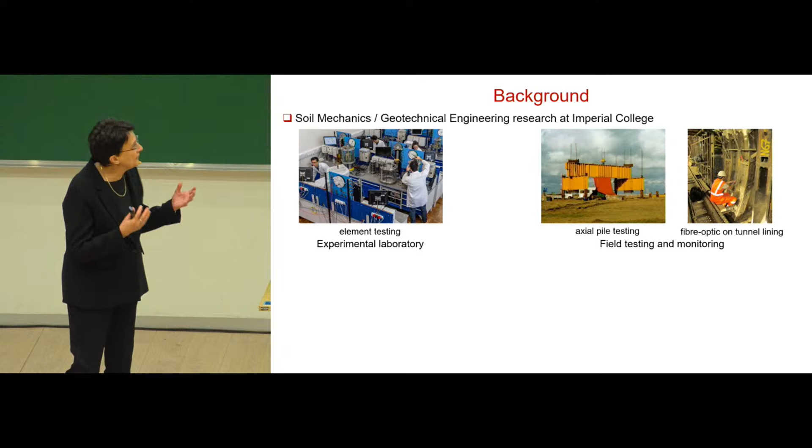The other part of our research, also from those early days, is field testing and monitoring. So going into the field, here having a rig with an instrumented pile being pushed into different soils to enhance the design methods for driven piles. And then instrumentation, developing some of the sensors, but also going into the live national infrastructure.

My colleague Jamie Standing was here last year to give a lecture about this, placing fiber optic sensors or many other sensors in tunnels or on the ground surface to monitor deformations.

And then the third part of our research is computational analysis, computational geomechanics, that started to develop with Professor David Potts in the early 80s when he became a member of staff at Imperial. We developed our own code from scratch, so it is very simply called ICFEP, the Imperial College Finite Element Program.

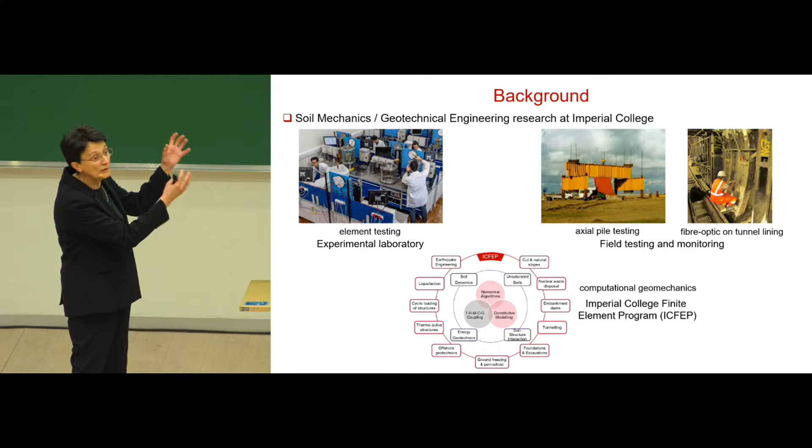It is fully coupled with thermo, hydro-mechanical, chemical and other processes in the soil. We developed the actual nitty-gritties of numerical algorithms, but also constitutive models, boundary conditions, and then applied them in the range as we developed over the years. This is not all developed at once; we still develop the code as the problems in geotechnical engineering keep coming out, requiring new answers to be devised and explained.

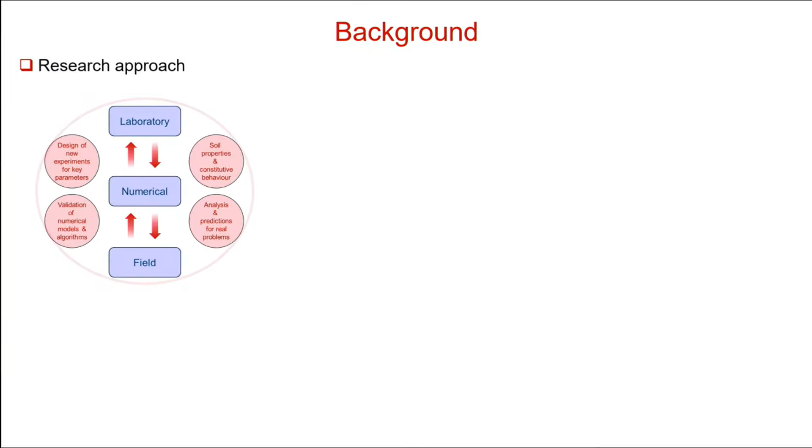So the research approach that we've always had, in particular in numerical modeling, has been this continuous interaction between the laboratory and the field, getting the input to numerical modeling from the laboratory, analyzing, predicting the behavior of geotechnical structures, and then, when possible, having the precious monitoring data to validate our predictions, and then go back and instruct the laboratory what other tests need to be done to define the parameters of the soil behavior that we need in particular applications.

In addition to this, we have always worked very closely with industry. From the early days, David Potts has always been engaged with offshore developers, in early days oil and gas, then infrastructure with earth dams, embankments, slopes, working with London Underground because of the metro network, with Network Rail, with Environment Agency for flood defenses and things like that. And then, obviously, tunneling, deep excavations, that is the bread and butter type of work.

More recently, as the demand for energy transition grew with climate change and reduction of carbon emissions, working on foundation systems for offshore wind farms, as well as with thermo-mechanical coupling with thermoactive geostructures to use the potential of geothermal energy to translate that into effective heating and cooling of buildings, and nuclear energy, and so on. So this is the framework within which we have operated for over 40 years. As I said, we are still developing the code and still carrying on with our numerical work.

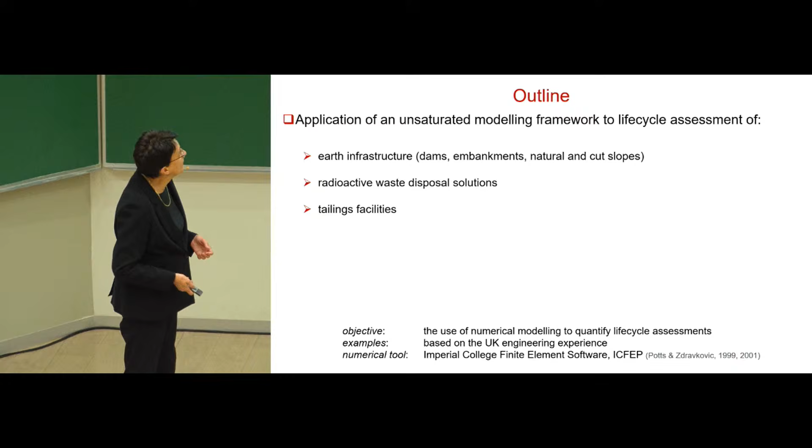The radioactive waste disposal solutions may not be an obvious thing, but this is very important for the UK because the solution is using highly swelling clays as engineered barrier for this disposal. And then tailings facilities is something that we have started to work with more recently, again, engaging through students' projects, master projects, final year projects with different companies to address certain problems, what the mechanisms may look like in certain situations.

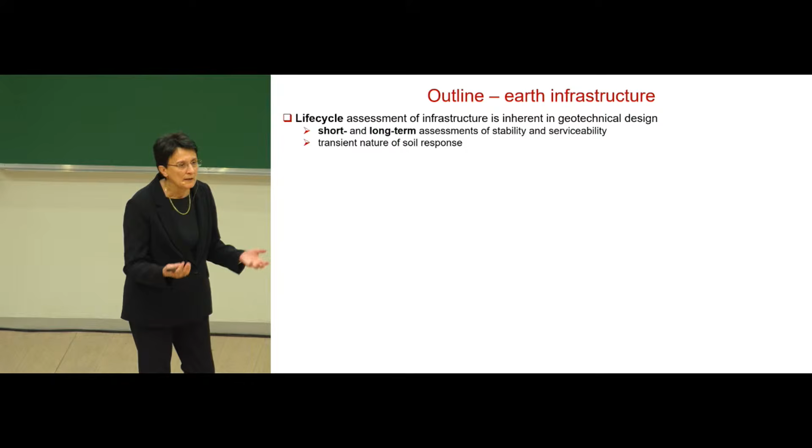So starting with earth infrastructure, the objective for using numerical analysis often is, and in the UK that is currently a very frequent demand, life cycle assessment of infrastructure from being constructed to at least 120 years in the future, which is a design life for most of the structures that are currently being built, on our most recent project, high-speed rail. So all the cuttings, cut slopes, tunnels, they are required to be designed for 120 years design life.

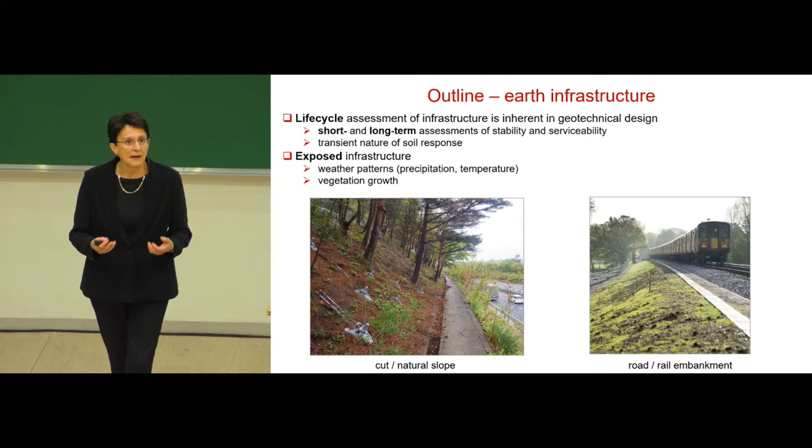So when we look at this sort of short and long-term assessment, this life cycle has always been in geotechnical engineering, because that is what we do. We often have short-term stability, long-term stability, serviceability. And in this case, I will concentrate on what I call here exposed infrastructure, because we have not just the soil-structure interaction, we have the interaction with the atmosphere, so precipitation, temperature, as well as interaction with the vegetation.

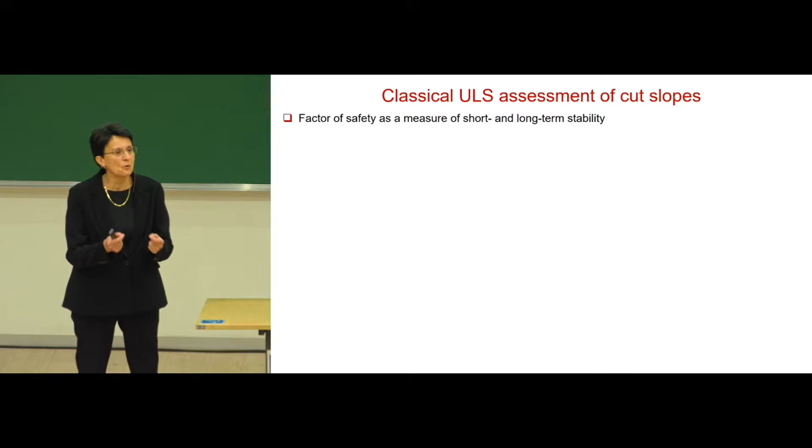So most of the slopes in the cuttings or in embankments are vegetated, and that causes issues in maintenance. So the question here is, what is it that we need to quantify in this life cycle assessment, and how? And through these three settings, I will go through the development of the approach over the years as the demands for assessment grew in engineering practice. So starting with delayed failure of infrastructure slopes, traditionally in classical ULS assessments of cut slopes, factor of safety has always been a parameter to quantify the short and long-term stability.

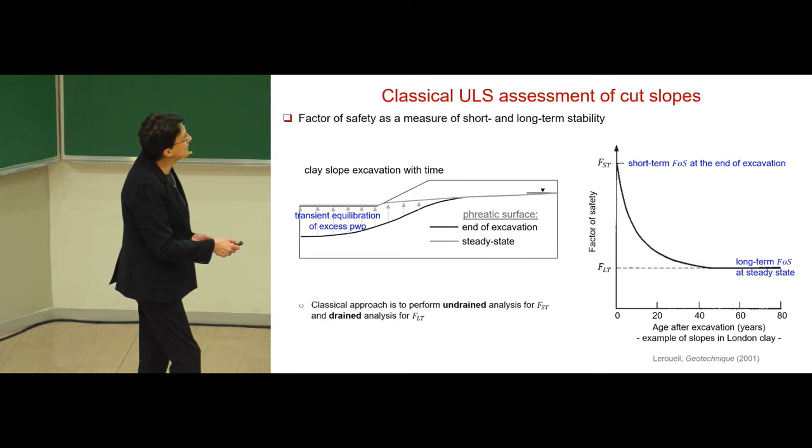And what we traditionally do is perform an undrained analysis to calculate a short-term factor of safety, and then a drained analysis to calculate the long-term factor of safety. But in reality, the soil behavior really is transitional between the two.

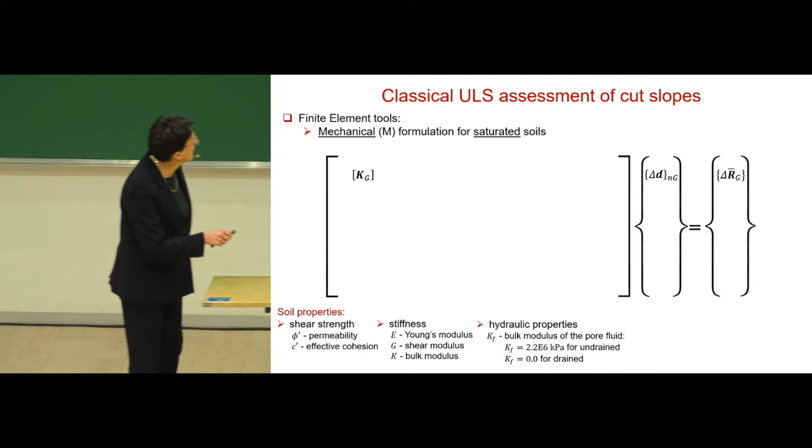And in terms of computational analysis, finite element analysis, this is a typical governing equation for saturated soils. So this is where we started back in the 80s and 90s. We have just displacement degrees of freedom. In terms of soil properties, we are worrying about shear strength and stiffness. And then for hydraulic properties, we need to use a bulk modulus of the pore fluid, which is a high value for undrained analysis or 0 for drained analysis. So, from today's perspective, a reasonably simple finite element setting.

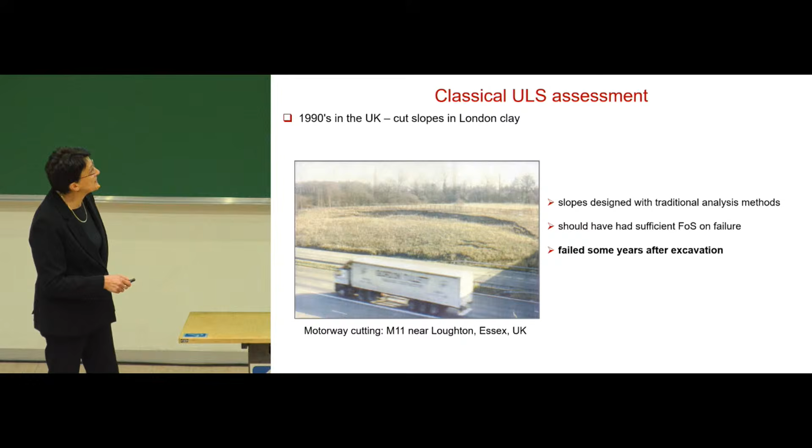The problem started to appear in the 90s when some of the slopes, these cut slopes that were constructed decades before, suddenly started to fail. Although their original design had a sufficient factor of safety, these slopes started to fail some years after excavation. The reason for this was attributed to progressive failure, but without numerical analysis it was difficult to actually quantify and demonstrate that mechanism.

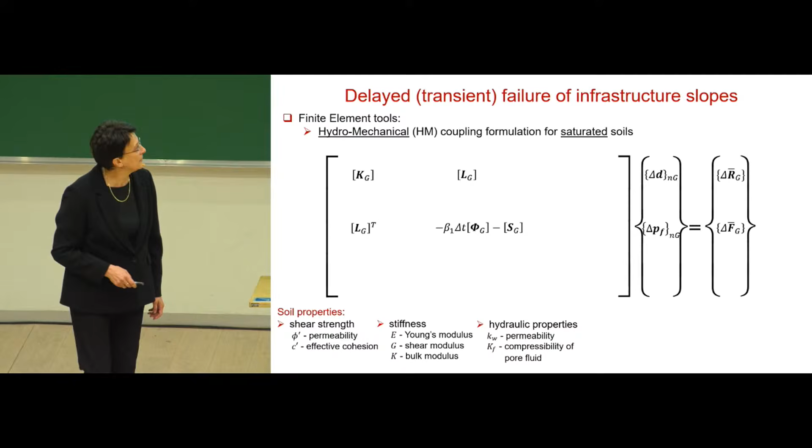And so for this reason, we have to move to transient analysis, to coupled analysis, because this is neither a drained nor undrained state. It is a state somewhere in between those two limits. So a hydromechanically coupled formulation for saturated soils requires a pore pressure degree of freedom, some coupling matrices, and the permeability of the soil, as well as compressibility of the pore fluid, in addition to what we do with the mechanical aspect of the soil.

And therefore, we now need to look at the soil behavior more closely, because this type of failure will appear in soils like London clay, so stiff, over-consolidated, plastic clay, that in our traditional q-p diagram will have a peak and then a reduction of strength to some residual value post-peak over a certain deformation.

So in these early days, we used a reasonably simple constitutive model, a Mohr-Coulomb model, but allowing that model to have strain softening from peak to residual, both in terms of phi' and in terms of cohesion. The rate of softening for London clay is from 5%, where the peak strength appears, to 20% at residual value. We also have to worry about the permeability of London clay, in particular the field permeability, because intact permeability obviously is not that representative in the field.

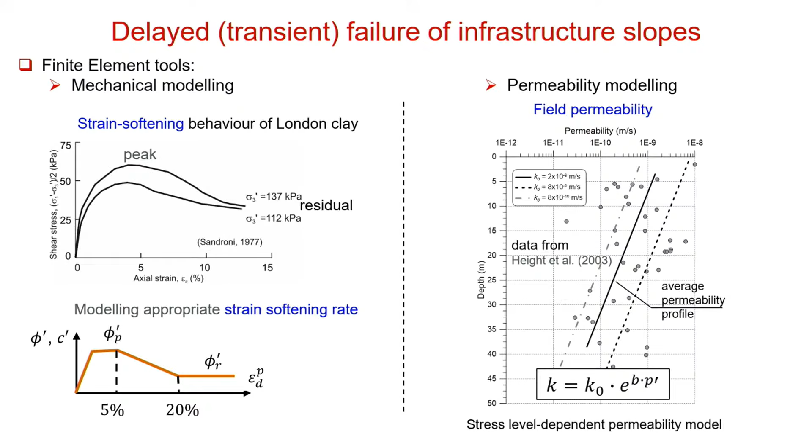London clay, being over-consolidated, is also a fissured material. And so the scatter that we see in permeability versus depth is reasonably large; people working in the field would recognize how notorious it is to actually measure the permeability of any material. But what is obvious here is that permeability seemingly reduces with depth, but actually it is not depth. It is permeability that reduces with stress level, and in our treatment of London clay we use an exponential function, where K0 is permeability near the surface, and it reduces as the mean effective stress increases with depth.

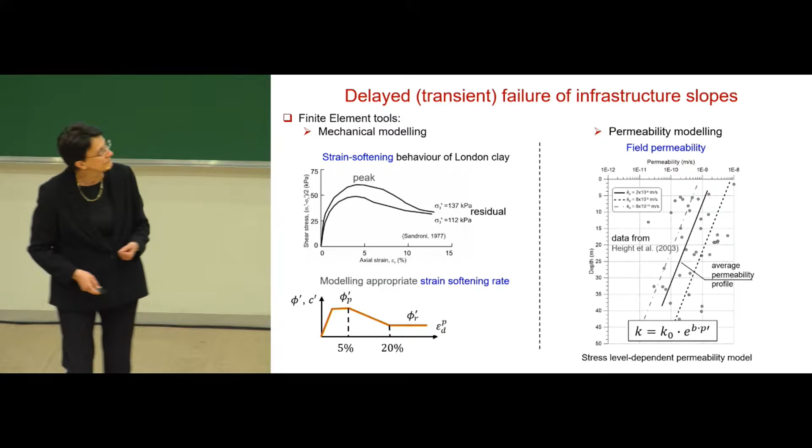So the other thing that now becomes important to introduce in the analysis, when we simulate this excavation and we end up having this new boundary, starting from the reasonably horizontal ground surface, we have a slope and then the base of excavation, is the hydraulic boundary condition.

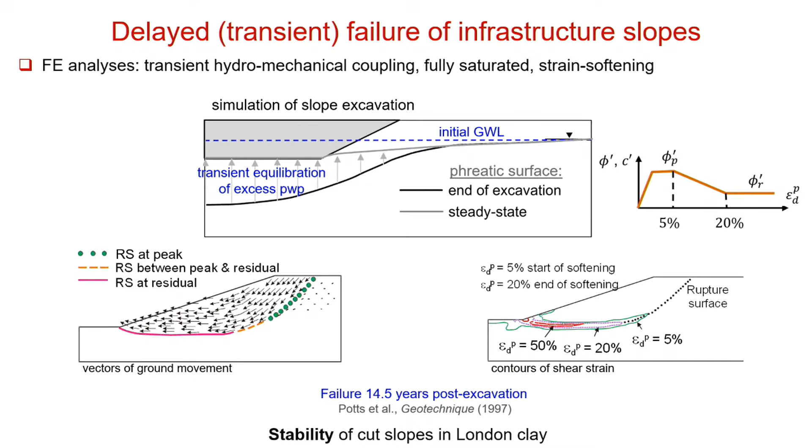So the shear zone clearly develops, and in this particular case, for this geometry, failure happens 14.5 years post-excavation, and vectors of ground movement show that failure very clearly.

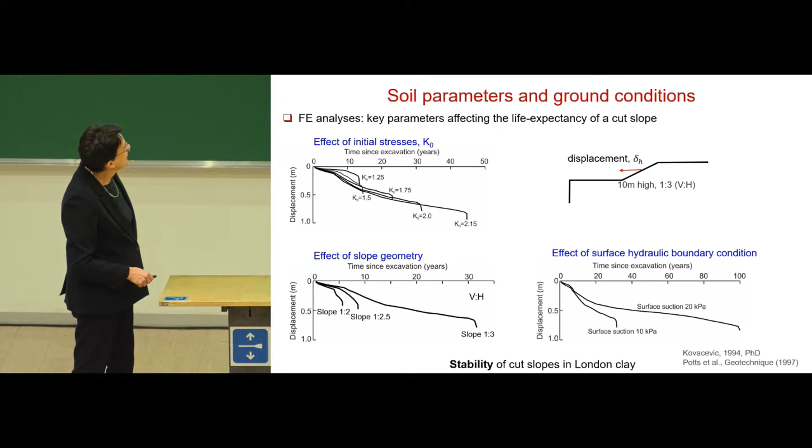But you can see these vertical sort of cusps indicate that these are very sudden failures when they happen. How the slope inclination affects it, and also how this pore pressure boundary condition affects that stability. And most importantly, how the softening rate affects that stability.

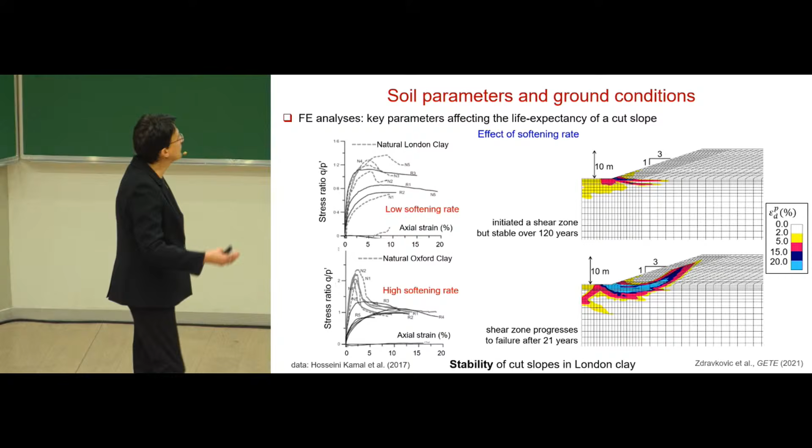So for London clay softening rate, which is something that we call here low softening rate, for a slope of these dimensions, the shear surface may start to develop, but then it remains stable for all 120 years of the expected design life. But for our stiffer, older clays, like Kimmeridge clay, like Oxford clay, that have much more rapid softening rate, the same slope would fail after 21 years.

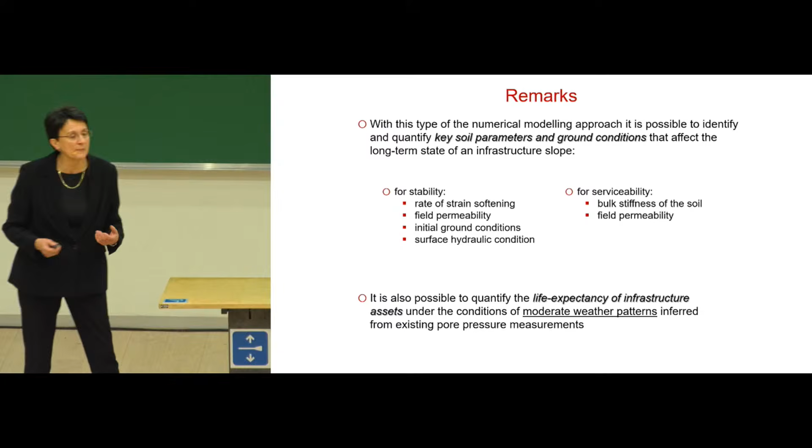So with this modeling framework, we started to be able to quantify both the soil parameters as well as ground conditions that would affect the stability and serviceability, and also quantify the life expectancy of such infrastructure, not only slopes but embankments as well.

But this was all done at the time when we had a moderate climate. Peter Vaughan was measuring very repetitive seasonal changes in the pore pressure, and we could use a pore pressure boundary condition.

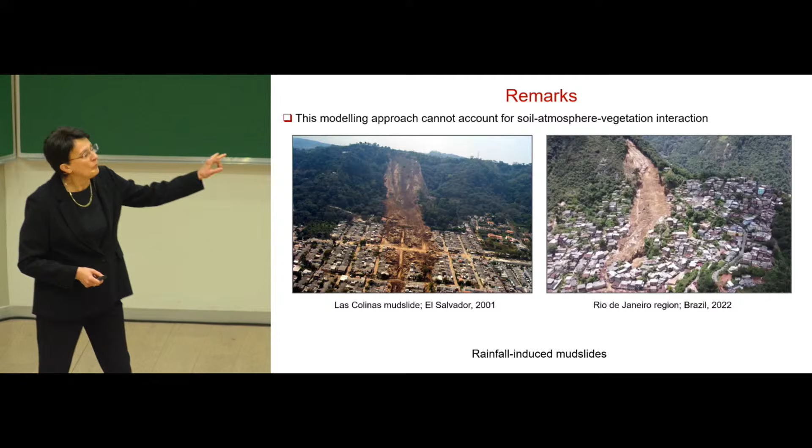But when we go further afield, to areas where rainfall is the main driving force inducing landslides or mudslides, and more recently in the UK as well, after heavy rainfall we very frequently see a slip like this in an embankment, or a slope getting deformed, because the climate has started to change. We have more and more heavy rainfall from the ex-tropical storms from the West Atlantic, and from the records from 2000 onwards, the intensity is much, much higher.

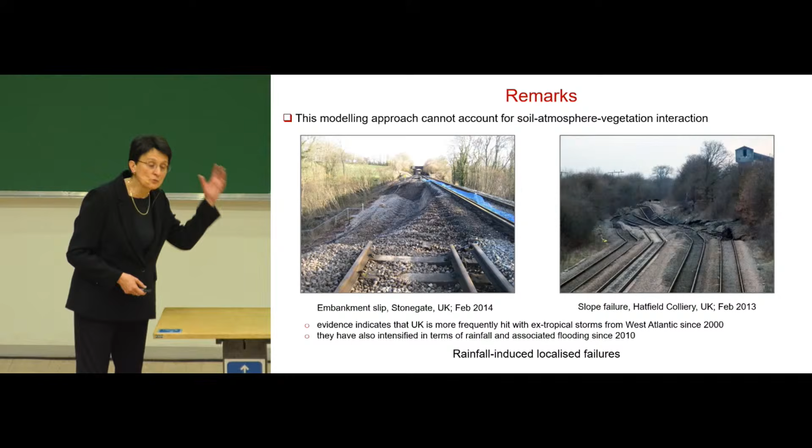So with the framework that we have, which is a saturated framework, we can't really tackle problems like this. And that is where the evolution of the modeling framework comes, having to take care of the interaction between the soil and the atmosphere in terms of rainfall, but at the same time take care of what the vegetation is doing in the slopes and embankments, so the whole soil, atmosphere, vegetation interaction, because the roots of the vegetation will be taking the water out at depth, and that depends on the suction in the soil.

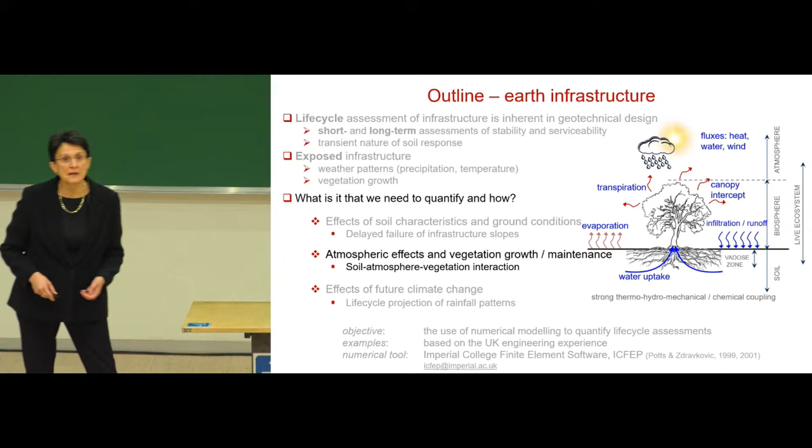Evaporation is happening from the ground surface, and rainfall comes in, and it either goes into the ground or runs off. So we have to move from this boundary condition to actually taking account of rainfall itself directly. And so we need to develop boundary conditions now, like precipitation, which is a dual boundary condition that will either allow infiltration into the soil if the permeability of the soil allows it, or if it doesn't, it will essentially run off.

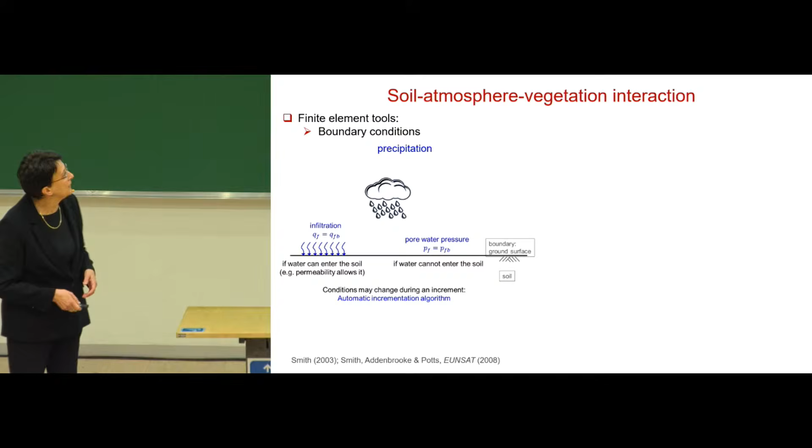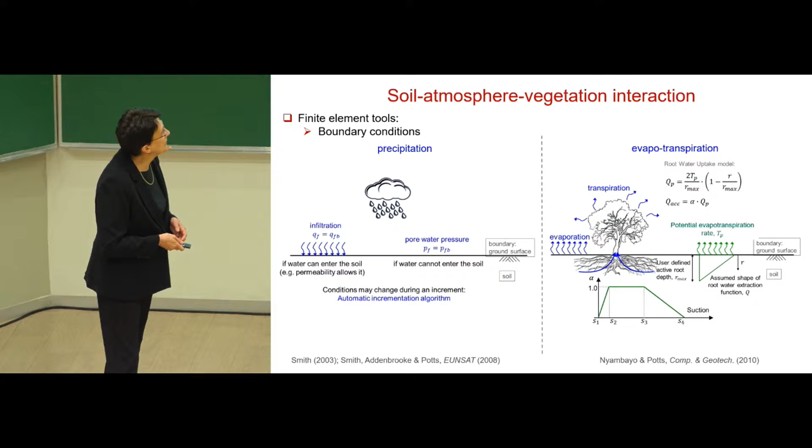We also need to change our constitutive mechanical model for the soil, and here we have adopted the Barcelona Basic Model framework, one of the first and one that has lasted the longest and been proven, but also enhanced with various other developments. This modeling framework allows us to take account of the strength increase in the soil due to suction, because that is what suction would do. So in our deviatoric stress, mean stress diagram, that allows us to go onto the negative side of the stresses. In the suction mean stress plane, that is again the increase of strength with suction from saturated to further unsaturated conditions.

And most importantly, this constitutive model allows us to capture the wetting-induced collapse in the soil, because rainfall infiltration can flood the soil, destroy the menisci of the tensile forces that are holding the particles together, and therefore cause the collapse of the material. The saturated framework cannot give us that. If we put more water into saturated soil, it will just heave. So we need this framework to actually model what is more realistic.

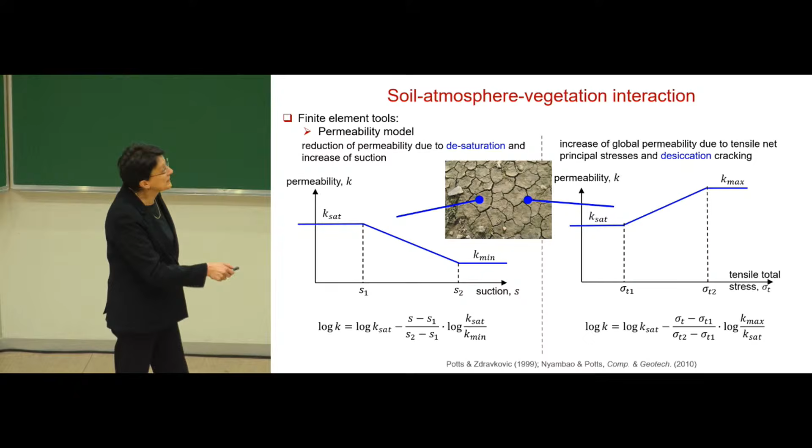And if we have only that model, then at some point, because the permeability is in units meters per second, permeability will become so small that the rainfall infiltration, which is also in meters per second, would not be able to get into the soil, which may not be realistic. When we look at the soil that shrinks and cracks, it has desiccation cracking, the cracks that increase the bulk permeability of the natural material. So what we have here is the permeability increasing depending on the tensile stress in the soil. And that, again, is a logarithmic function that will allow the water to go in if there is desiccation cracking in the soil.

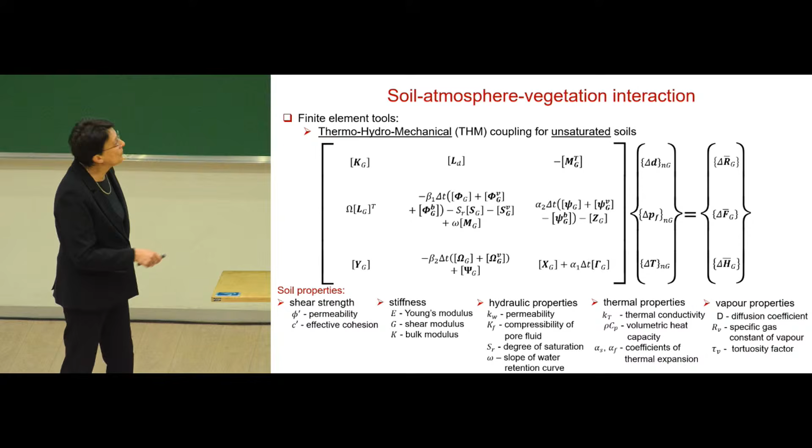So the governing equations become a bit more complex, in particular if we want to introduce temperature as well as a degree of freedom. So a 3 by 3 matrix. Here in hydraulic properties we have degree of saturation, the gradient of the water retention curve that goes into this part here, and then thermal properties, conductivity, volumetric heat capacity, and so on that need to be known about any soil. But what can we now do with this framework?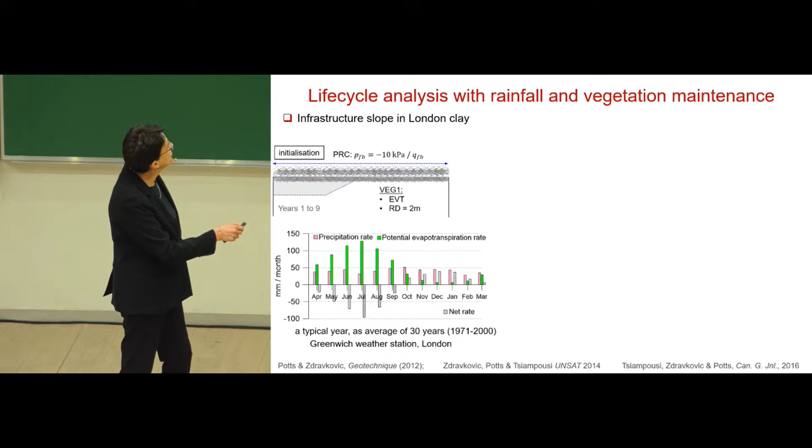So we can start now to apply this life cycle analysis in great detail, starting with a particular site where there was forest before, so trees with a high 2-meter root depth, high water demand for the roots. For about 9 years, we cycle this typical year until we get stable initial pore pressures at the end of August, end of the summer, and the end of March, which is end of winter. We can then simulate the excavation of the slope in year 10, and for the next 10 years, control the growth of vegetation to some low shrubs, low water demand, root depth of 0.5 meters. Precipitation is there all the time.

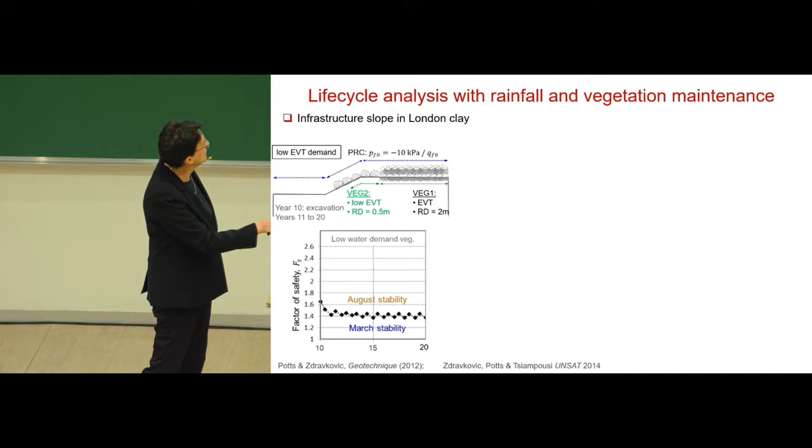And we can see, this is from numerical analysis, factor of safety. This is an algorithm that we developed, dependent on a constitutive model and implemented in the code. We established a factor of safety in this slope of about 1.4, but you can see, which is what we would expect, a slight difference between the factor of safety value in March, end of winter, slightly smaller, and slightly larger in the summer, end of August. And then, as it happens, maybe another 10 years, nobody controls the vegetation, and the trees grow again.

So again, high water demand, and the factor of safety in the slope grows over those 10 years, again with a slight difference between August and March stability, to something like 2.2. And then somebody sees that vegetation is now obstructing the signs, and the decision is made just to cut the vegetation down to nothing, to grass.

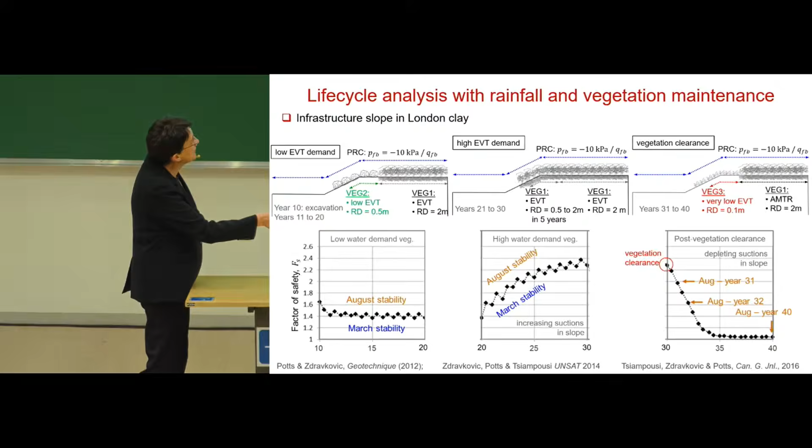And for the next 10 years, if this stays maintained at grass level, then here we see a not rapid, but gradual reduction in the factor of safety to practically bare stability of 1.05. So within 5 years, because there are no trees there are no suctions in the soil, and the precipitation, which cycles all the time, will gradually reduce that stability.

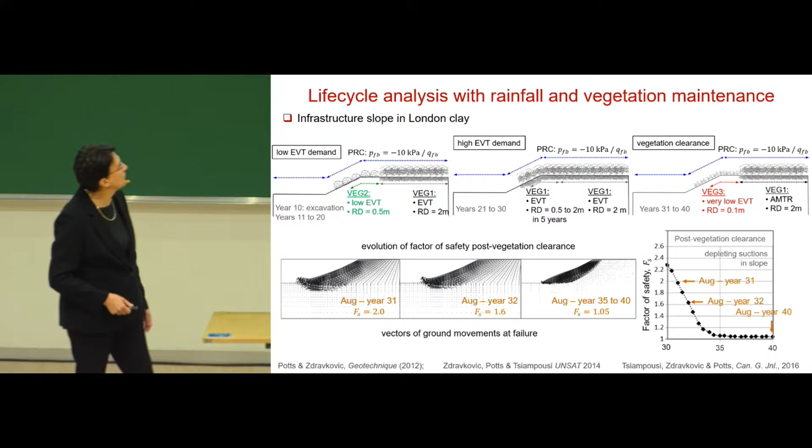And we can see that in the vectors of ground movement for the same 3 cases here. So at the beginning, the mechanism here is quite deep, because quite a lot of soil needs to be mobilized for this to fail, whereas somewhere here, this is already a very shallow failure that is nearly there to go.

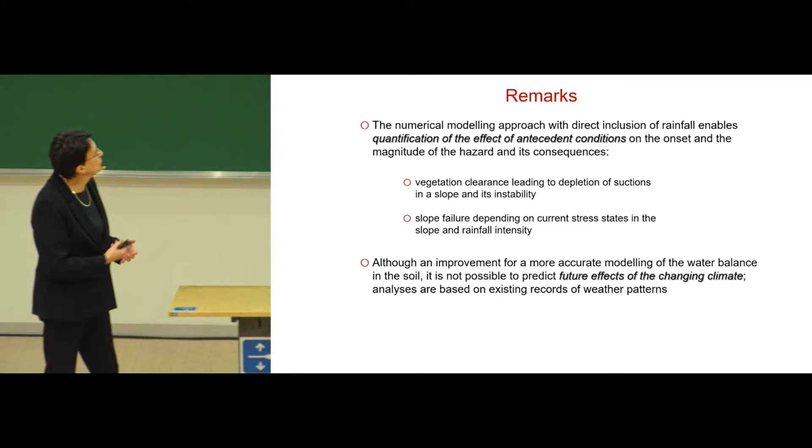So with this numerical approach now, we are able to take rainfall into the analysis and to look at these antecedent conditions, just before the rain comes, what happens. And what is missing now: we are able to do a full life cycle analysis, but we are not able to look at the future effects of climate change.

Because in the UK in particular, we now have legislation because of the legal obligation to get to net zero by year 2050. This document here, PAS 2080, the document that projects to year 2080, came out in 2023. It sets out various clauses for industry. I'm just showing one clause as an example: prioritize nature-based solutions to reduce whole life carbon emissions, and so on and so forth.

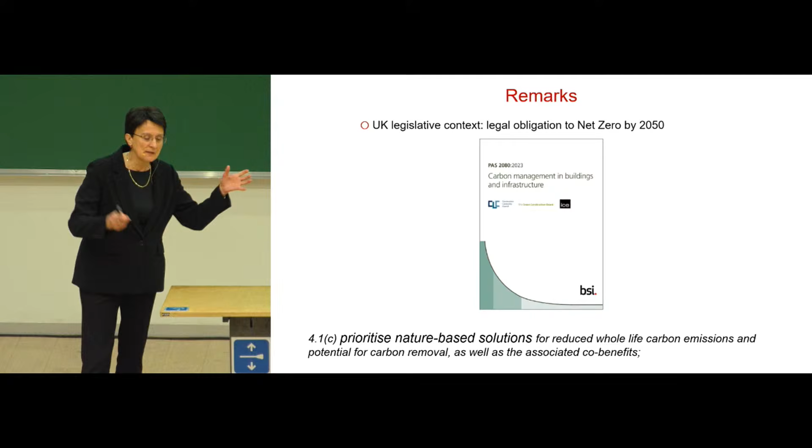So to predict what is going to happen, we need to do something else, because previously we were just using the existing known rainfall records. So the effect of future climate change now requires us to work a little bit with our hydrologist colleagues and see how they model these projections. We're working with our colleagues in the environmental section at Imperial.

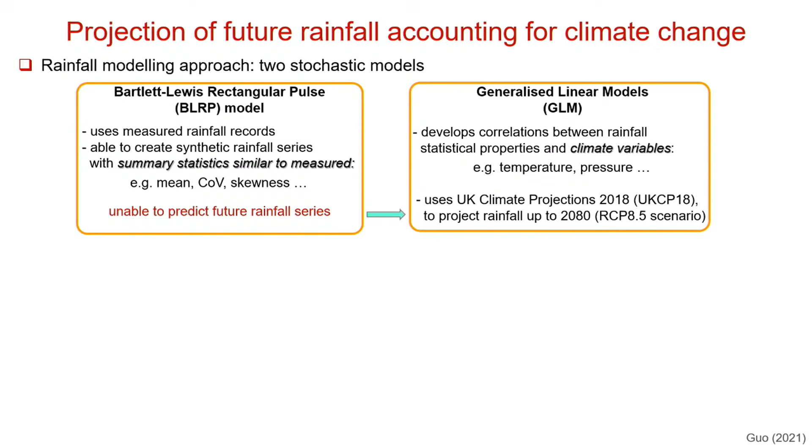And these climate parameter projections in the UK are already there, so that is a database developed in 2018 that gives the projections of parameters like temperature, pressure, dew point, and so on to year 2080. And without going into details of how all of that works with these two types of models, this is what we get for this weather station in Essex.

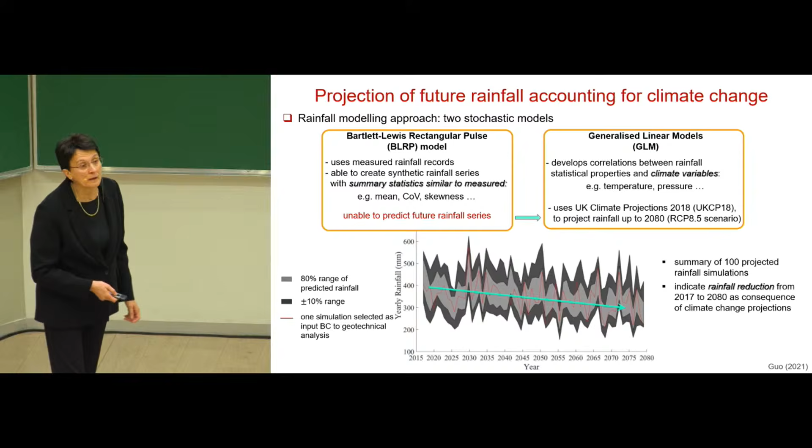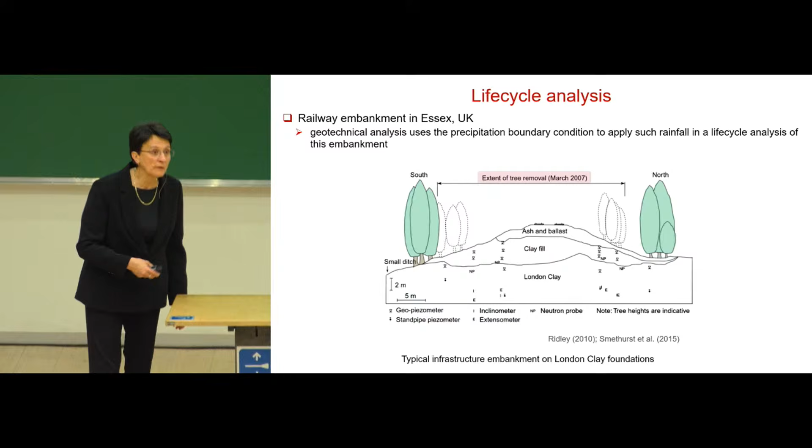These embankments are very old, probably 100, 150 years, constructed from just clay fill, clay lumps dumped on site, and therefore over time, to maintain the level of the rail, other material was added on top as this was deforming, to actually keep that level. Initially locomotive ash while steam engines were running, and more recently ballast that comes either commercially or from reuse of some other material.

Here, because of the obstruction of a network rail line, these trees were removed, and the embankment was monitored for a year, for the whole year 2006 to 2007, to establish the stresses and movements in the embankment. Trees were cut in March 2007, and monitoring continued for another 4 years to 2011.

So this is where we do our life cycle analysis. This was agricultural land on London clay, weathered and unweathered. We treat the weathered London clay as unsaturated, as before. We have grass, and we apply an average rainfall for a certain period of time.

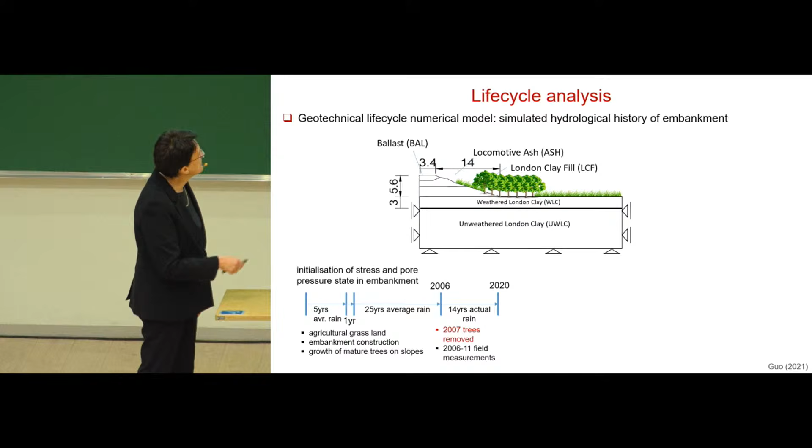We then construct the embankment. We have a further 25 years of average rainfall, and we allow the growth of mature trees on the slope of the embankment. Then from 2006 to 2020, we have the removal of the trees in 2007 and these measurements. From 2020, we apply our projection of 60 years of rainfall to 2080. So, using the measurements to validate the model first, let's look briefly at the mid-slope cross-section.

The graph shows vertical displacements, with negative values as settlements, for the year March 2006 to March 2007. This is a typical seasonal variation in vertical deformation: shrinkage during the summer causing settlements, and then from September onwards, rainfall wetting causes the embankment to swell back.

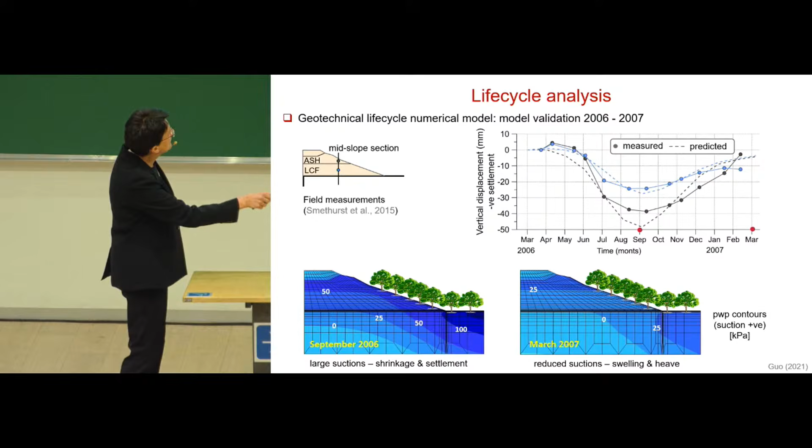In September, at the end of summer, we have quite high suctions because of these trees: 50 kPa in the embankment, 100 kPa down in the foundation soil. Then in March 2007, before the trees were removed, these suctions had gone down because of rainfall infiltration.

Then the trees are cut, so that boundary condition from the roots stops. By September 2007, there is hardly any change in these suctions in the embankment compared to the previous September, because there are no trees there and no water being taken out.

We look again at vertical displacements in these cross sections for the next 4 years. Essentially, the embankment is heaving. The numerical model, both in the previous case and in these 4 years of available measurements, is capable of capturing these movements at these two points.

But what we now want to look at is what is of interest with this life cycle analysis - this is now the projection. What I'm plotting here is elevation, in this cross-section, versus horizontal displacements, and on this graph, the pore pressures.

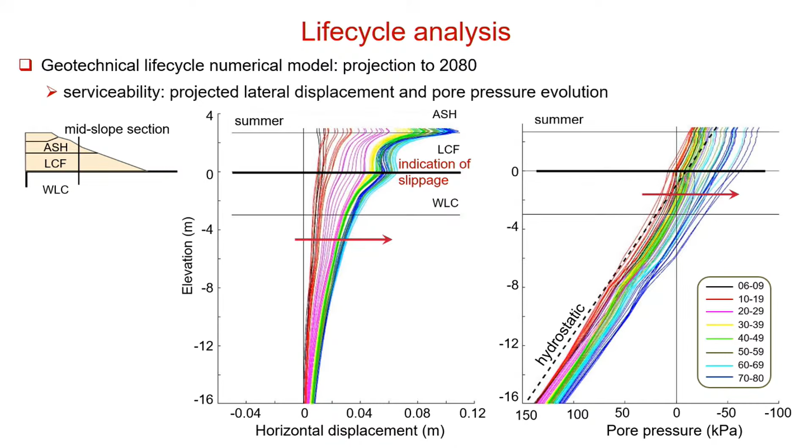Is there any danger of any future instabilities? Of course, the rainfall is there, applied constantly. In this case, that doesn't seem to be much of a problem, but if it was, certain measures could be devised to prevent that.

We can see the drying out, because that projection of rainfall until year 2080 was indicating the area would be drying out as rainfall reduced, and here the suctions are definitely increasing to year 2080. This is in the summer; obviously there is a recovery in the winter.

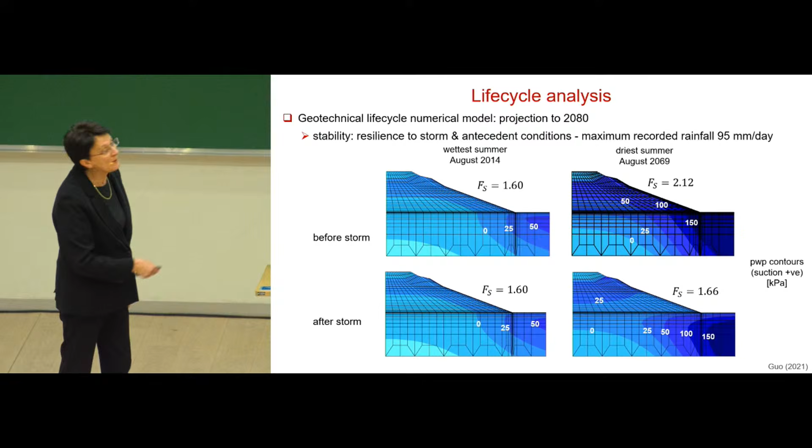We can also do spot checks of stability to storm and antecedent conditions. We had 95 millimeters per day as the highest rainfall. Applying that in the embankment during the wettest summer, the factor of safety before the storm was 1.6, and after the storm it really doesn't change because the embankment is reasonably saturated and most of the rain has just run off.

But in the dry summer, projected for year 2069, the factor of safety here, 2.12, is quite reduced - so the embankment remains stable, but there is a dramatic reduction in that factor of safety due to rainfall.

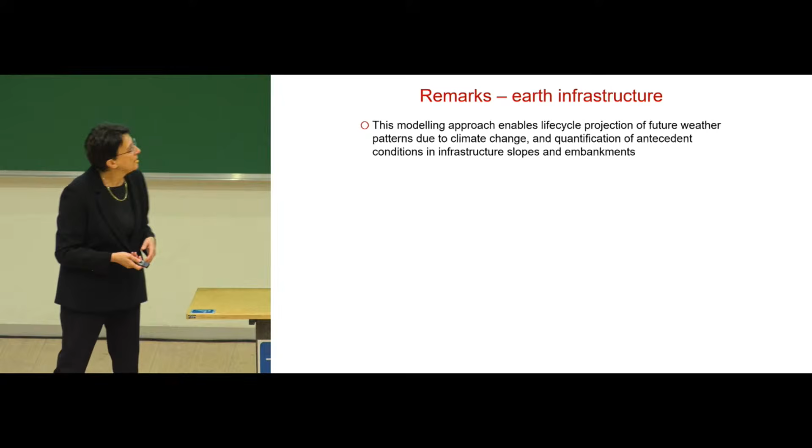So this is what we become able to assess with this modeling approach, because we have essentially all the ingredients that we can control to a certain extent. We can bar the statistical analysis that involves the projection of rainfall, where there are many combinations and aspects of which parameter one takes into those projections, but we can have reasonable projections into the future.

So this modeling framework as it is, we are now going to apply to a different boundary condition: radioactive waste disposal, and it will become a little bit more complicated. There's not going to be rainfall here as such, but we're talking now of highly swelling clays.

In the UK, because it does have nuclear energy within the energy mix, we have lots of waste from the existing power stations, and government a couple of years ago made a decision to invest more into nuclear for this green, clean energy. Wind is already very much developed in the UK, and nuclear is aiming to have a similar proportion in the energy mix.

The radioactive waste inventory in 2022 showed that there is already 4.5 million cubic meters of waste, but luckily there are three categories of radioactivity: high level, intermediate and low level waste. This high level waste, which is most radioactive, is actually there in the smallest quantities. 99% of radioactive waste is intermediate and low level waste.

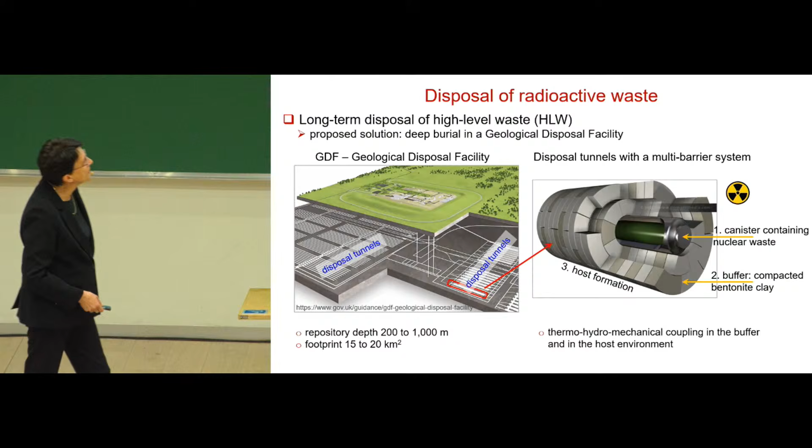So the process here: bentonite, as many of you would know, is a highly swelling clay. It needs to have a high density, it needs to be compacted to high density when it's placed around the canister. Therefore it has initially very high suction, and the processes going on in that bit of bentonite are quite complex, because on one side is the canister, which generates heat due to the energy of the nuclear waste there.

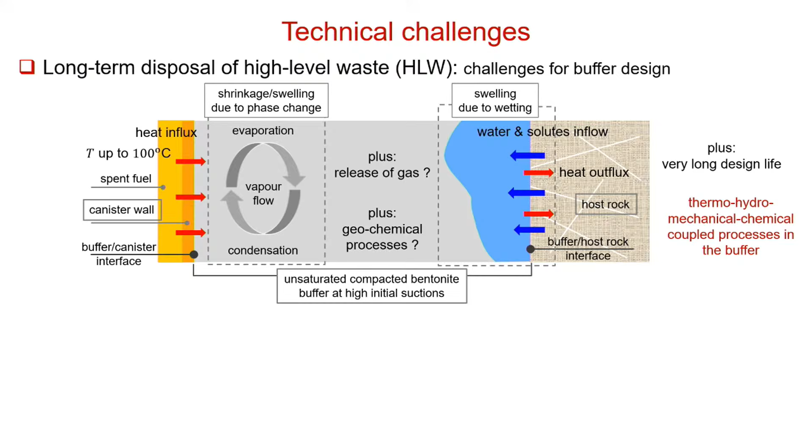The current temperature barrier is 100 degrees Celsius from the canister, whereas from the host formation, what is supposed to happen is the host formation needs to have good bearing of water, so that bentonite can actually take the water in and hydrate and swell to seal in the construction joints and reach the objective of having low permeability for any harmful materials to leach out.

The behavior of the bentonite here is, again, complex when it's in the compacted state. If you look at pore size density versus pore size diameter, in the as-compacted state, it has a dual porosity structure, so it has some larger particles and some tiny particles. So it has a macro and micro porosity.

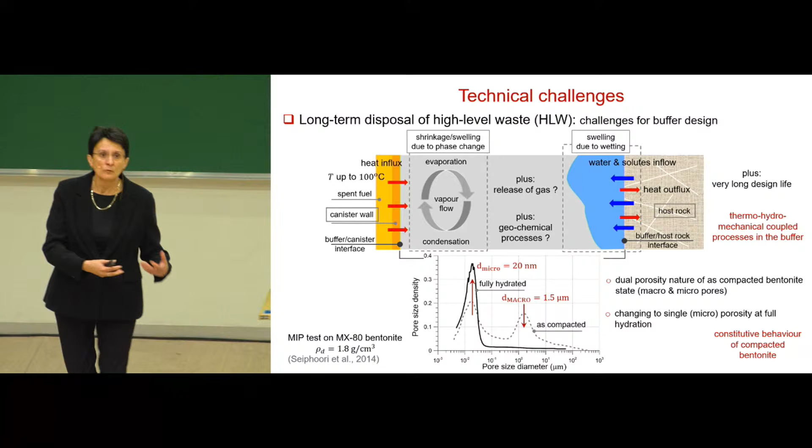What is supposed to happen during hydration is that all of this becomes homogenized, somewhere around here, with microporosity. So this has requirements on a constitutive model.

Where we are today, there isn't yet a GDF constructed in the world, because the solutions are still being examined. However, several countries have designed and built underground laboratories where these full-scale experiments are being conducted, using a heater rather than a nuclear waste canister.

So the objective for the buffer design is that hydration promotes the swelling and the sealing of construction joints and gaps, and mobilization of design swelling pressure, because the rock, obviously, when excavated, would have relaxed the stresses on the boundaries, so the swelling bentonite must not crack the rock.

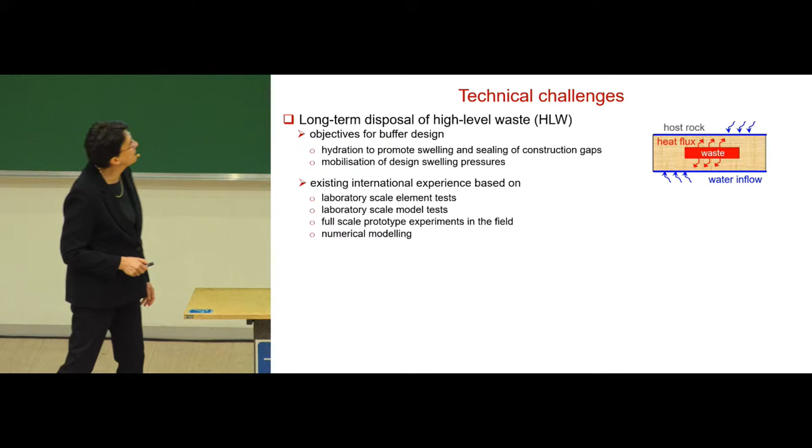So existing international experience is based on laboratory scale experiments, then laboratory scale model tests like column tests, and full-scale prototype experiments in the field, and obviously numerical modeling. Our experience at Imperial has been built around development of numerical tools, governing finite element equations, fully THM coupled and chemistry coupled, constitutive modeling of bentonite, looking at the temperature limit on bentonite, and groundwater chemistry.

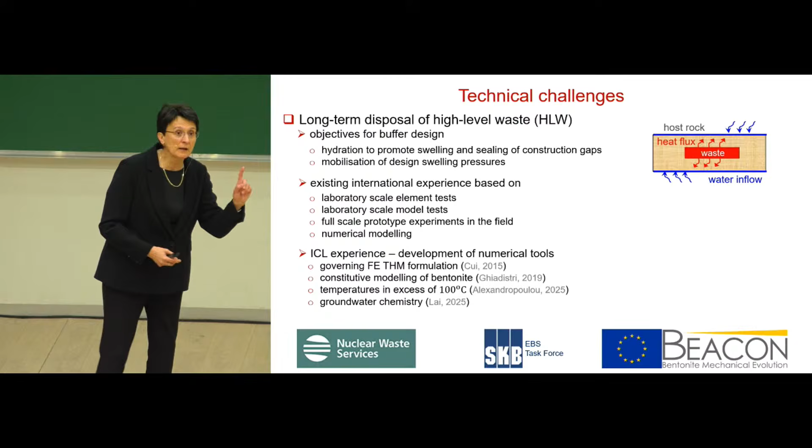We've been working for 15 years now, very closely with the UK Agency for Nuclear Waste Disposal, international task forces at European and international level looking at various aspects of barrier design, and large European projects with many participants from both industry and academia, led by key national European agencies for nuclear waste disposal.

What we use here is the same unsaturated framework as before. The constitutive model is the same, but what's enhanced is the double porosity concept, micro and macro porosity. The macro structure, the macro porosity, is the porosity between the aggregates of clay, whereas the micropores are inside the aggregates. So between the aggregates, and here inside the aggregates, there are mathematical functions linking the two.

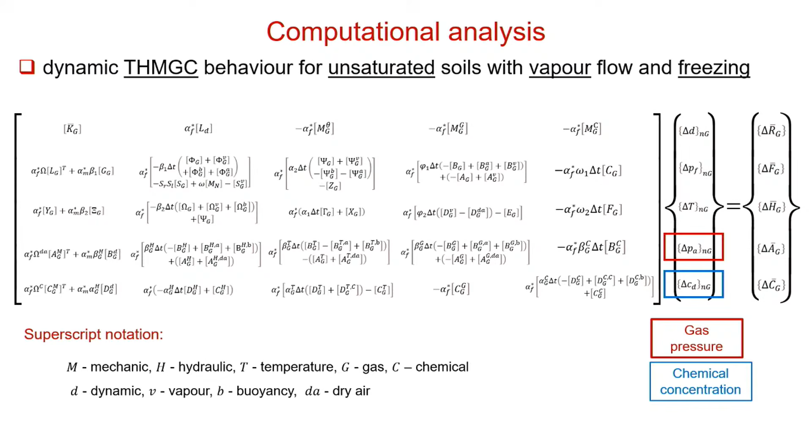I showed this governing finite element equation with displacements, pore pressures, and temperature, but this can get more complicated. In the UK, disposal sites can be along the coast, so we have saline water there, but also inside the mainland we have geology that produces saline groundwater. So chemical concentration can become one additional degree of freedom, and gas that's not at atmospheric pressure as in the previous formulation, but can be at elevated pressure. So we come here with this matrix being 5 by 5 at the moment that we are working with.

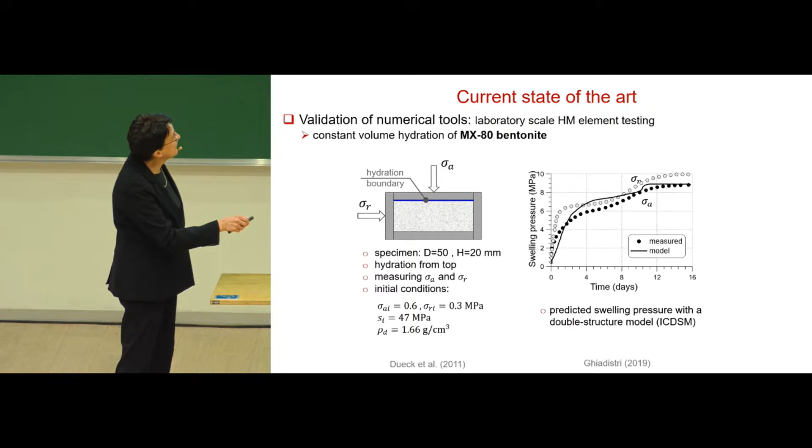So what we can do is validate this framework, starting as we expect from simple element tests, which for this type of problem are mainly oedometer tests with constant volume, swelling with a hydration boundary, having the measurements and the model, tracing the evolution of the swelling pressure.

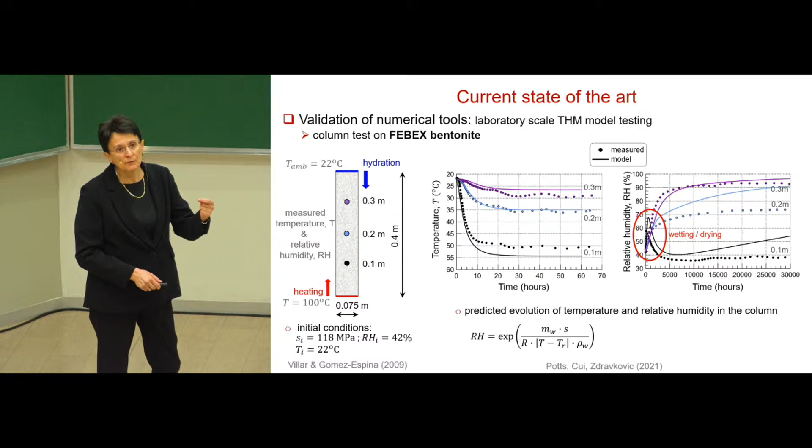The role of vapor in the THM coupling is very important. Formulations that don't have vapor migration would not capture this: in the lowest sensor closest to the heating boundary, the vapor will first increase the relative humidity, but then it will dry out as time progresses, and will then pick up wetting once the hydration front progresses.

What they did was run the heating for the first 5 years, then dismantled, switched off the first heater, took some data to look at, and then the second heater was dismantled after 18 years. So those are some long-term measurements we have, but clearly at the scale of the long-term that this problem has, this is not very much.

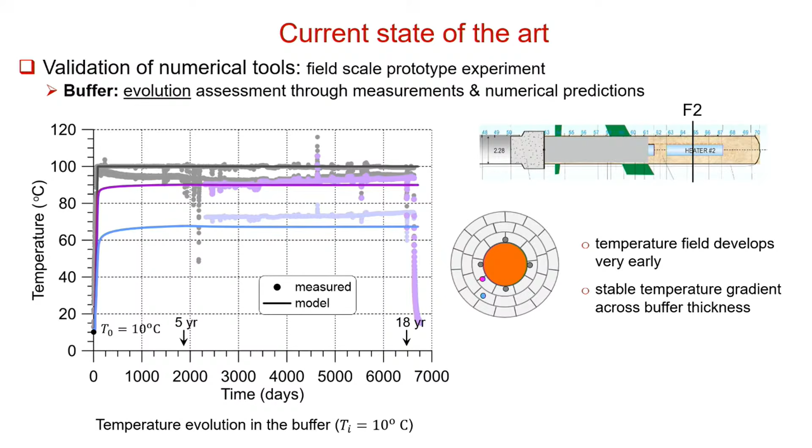So 18 years, this is color-coded sensors, temperature sensors. Next to the heater, gray lines; in the middle of the first ring, pink lines; and then the second ring here, blue lines. At least we learn both from the numerics and from the experiments that the temperature field develops very, very fast and remains stable within that period of 18 years.

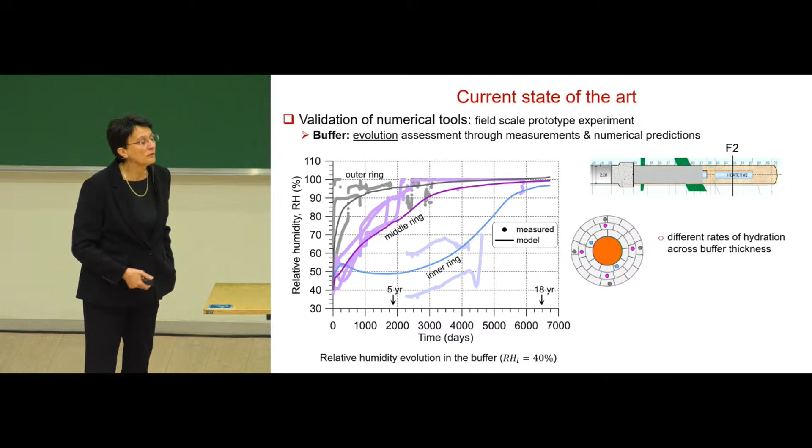But relative humidity, you can see also that some of the measurements didn't exist at the beginning, then picked up later on. Some stop, some go on. So when we talk about monitoring in the long term, there's always thinking about how these instruments are going to actually live and work over a long period of time.

Again here, being able to capture next to the rock interface, relative humidity increases reasonably fast and almost saturates. The middle ring is again captured reasonably well. The ring next to the heater has this initial vapor moisture, then drying out, then picks up again, but we really don't have very many measurements at that end. So that is one problem, the design of that engineered barrier itself.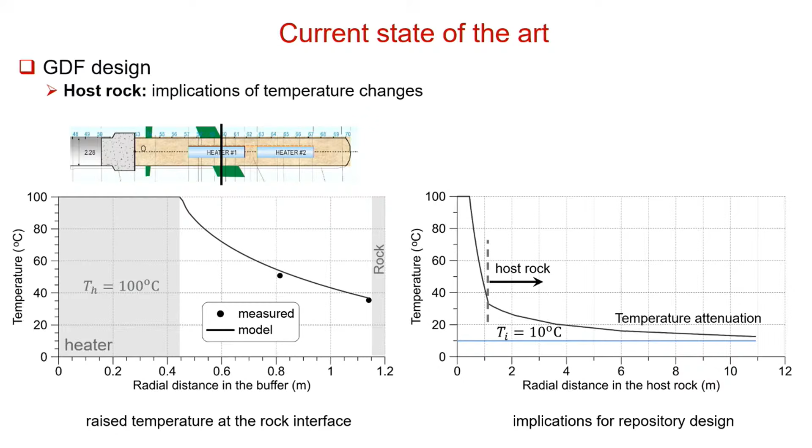Clearly the host rock gets a huge environmental impact because the temperature here doesn't decay over the thickness of the buffer. So we are leaving here about 40 degrees C compared to 10 degrees C that was the natural temperature of rock at that depth. So there is a decay period, and the length within the host rock for the decay of temperature has implications for how we design the whole repository.

So how many canisters we can place in each of the disposal galleries, what is the distance between them, and so on and so forth. So all of that is still not fully sorted out, although one country in Europe, Finland, has actually already got the permission of their government to start to design the actual repository.

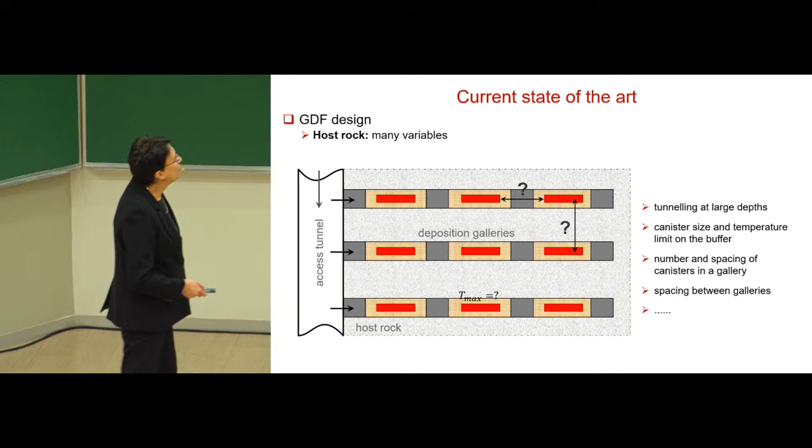In the UK, we don't yet have a decision on the site, so we can't even start to do anything. But we are underpinning the search for the site by doing this type of analysis. So for this application here, again, from our current experience, this is the most complex geotechnical example, has an extremely long design life and really multiple levels of coupling, including chemistry, and has strong demands on constitutive behavior.

But geotechnical analysis can accommodate these complex phenomena. The European projects, one of them that we participated in, was designed to benchmark what people can do with a FEBEX experiment and with other experiments, and how they compare, and then learn from all of that. The problem here, we are validating over short periods of time, but these analyses, these frameworks are currently used to produce a safe design.

And so with the third part, this is the shortest part. What I just want to give you here is a flavor. We started to work with tailings about 5-6 years ago. And what we do here is mainly exploratory studies to learn to understand how these structures should be modeled, can be modeled. And then what are the important things about them? What needs to be assessed?

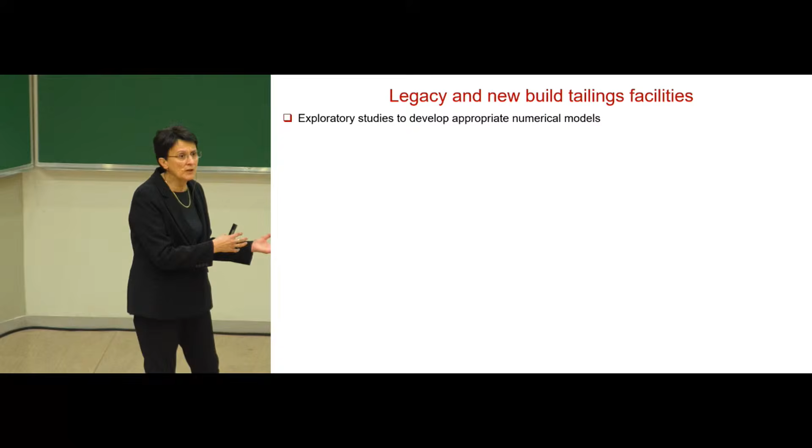And we are working here with industry, but doing PhD or master projects, final year projects, where we can actually explore these things. So one example here is the first PhD of David Solans, who was actually working in the tailings industry in Chile before coming to do a PhD with us. So he had data on several tailings facilities, but this tailings facility had some measurements with accelerometers at the crest and at the toe, at the base of the dam.

So the objective here was reproducing a reliable state of the tailings facility, because this is a very time-related construction, thinking about appropriate mechanical and hydraulic boundary conditions, maintaining the freeboard. Does that matter? Does that not matter? So this sketch here shows the elevation in meters above the ground level, and time in years. This was about 20-25 year construction. So there are some 8 rises here. Starter dam was the first, and then keeping 2 meter freeboard between every successive upstream dam, this is downstream dam, and the construction of slimes.

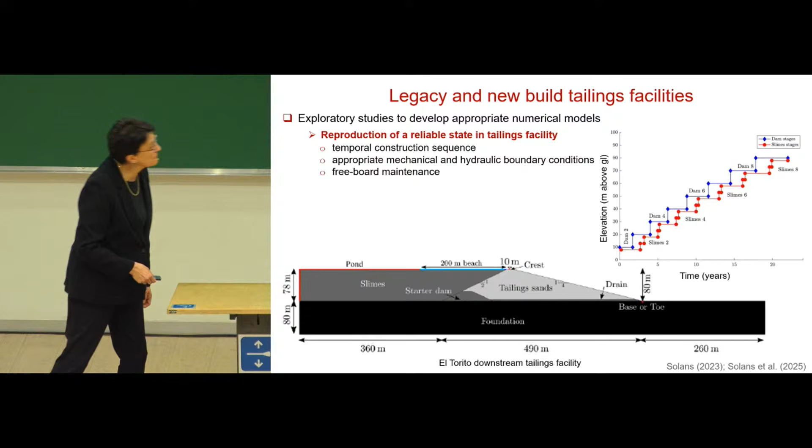So this particular case study had a 200-meter beach and then pond in the distance, and we started constructing layer by layer, keeping the beach, and the pond remains to the boundary of the finite element mesh, doing that for every elevation. And during the construction, in our approach, for every layer we prescribe the void ratio for the slimes and for the sand as well. That was estimated from the site.

And what we had here that was very useful was a set of CPT tests at the crest of the dam, 3 of them, that were interpreted here with Robertson, with Been and Jefferies, and some other interpretation. So the upper part of the dam is more dilative, obviously, than below. But our model here has reproduced reasonably closely, has captured that increase near the top, but also at the bottom, the state parameter within this crest. The minus 0.05 is what is uniformly adopted as a value of the state parameter that marks the possible onset of liquefaction.

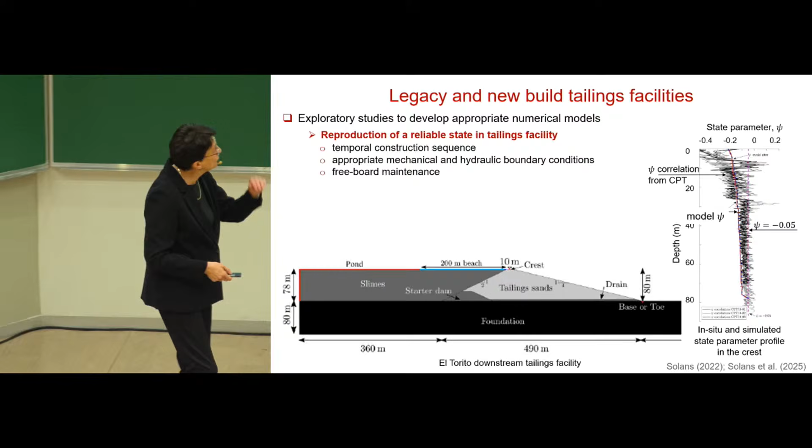So that took quite a lot. That was the first one that we did, and David Solans took a lot of effort to actually do it step by step with proper application of boundary conditions. But then applying the earthquake record, the Illapel 2015 earthquake record, he was able to show, again the colors here may not be quite clear, so the red color is the model and the blue color is the recorded.

On this side is the acceleration response spectra of the crest of the dam, and on this side is the response amplification spectra, so the ratio of crest over the base to show what the amplification is. And the model seems to capture that reasonably well.

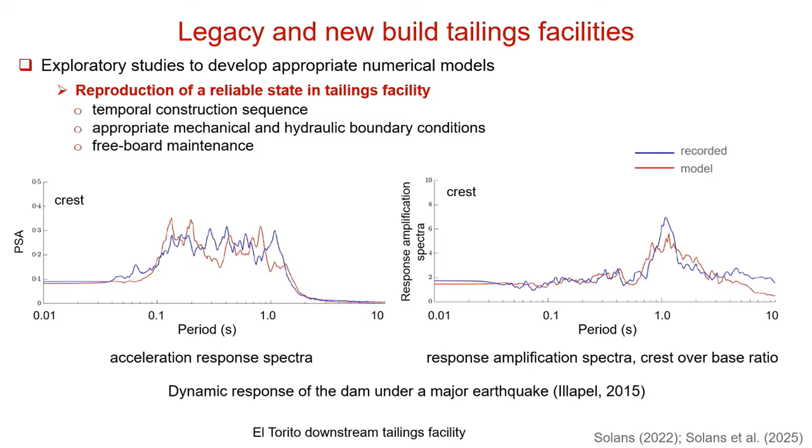And the dam has not failed, so I don't have time here to show the other results, but the predictions that David has for movements, they're all very small and very, very shallow. So the dam, after the earthquake, visually didn't get deformed, and our model was reproducing the same.

Then this example here was assessment of a filtered tailings. This was a master project of a student who also worked for one of the tailings companies in Peru, and she brought with her this case study of a filter tailings. But we didn't have any measurements there. None of the testing that was performed with this material was unsaturated testing at all.

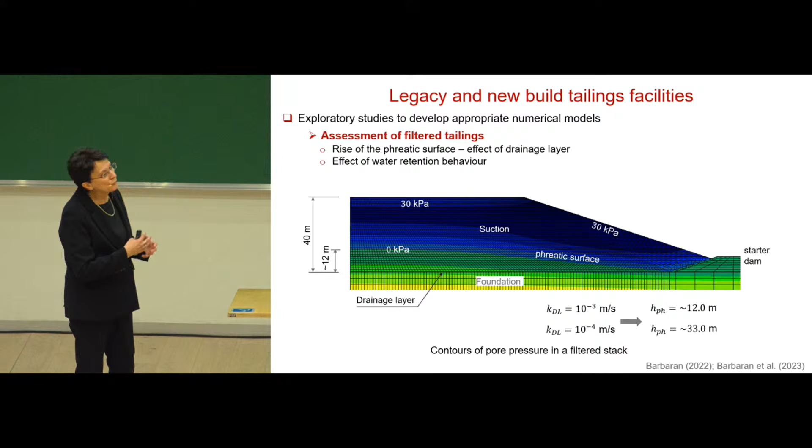So what Joanna did was to, again, look at the literature for what would be materials close to this particular tailings material in terms of water retention curves, and look at the effect of the water retention behavior. The other aspect that they were interested in was a drainage layer here, and what is the effect of that drainage layer working or not working.

So in the model, in this set of pore pressure contours that we have here, this is a phreatic surface. So the axis of symmetry here, that is 12 meters from the foundation level. This stack also has a starter dam to give the shape that was finally constructed. So with a drainage layer permeability of 10 to minus 3 meters per second, this phreatic surface rises here to

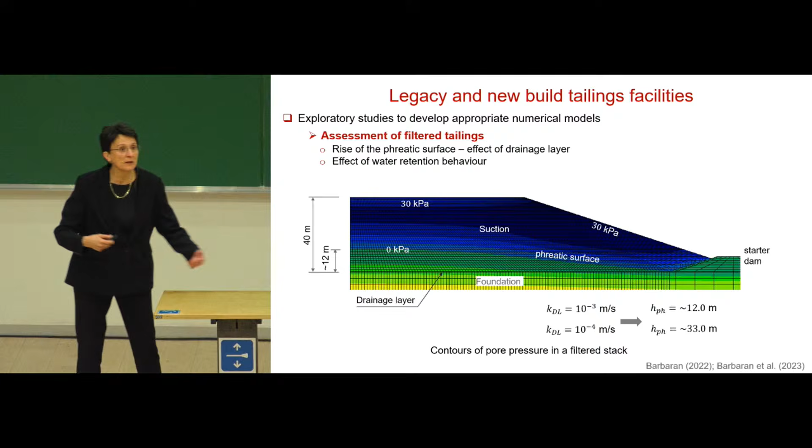12 meters. But then, again, parametrically, we reduced the permeability to 10 to minus 4, and the phreatic surface rose to 33 meters, so actually quite high. So there's many things that we did here as an exploratory study, and some of them are in a small conference paper that we published subsequently.

And then the other thing that we were asked to look at was this retrofitting of tailings facilities. This is again an MSc project. Nicolas de la Maza came also from Chile to do a master with us. And this was the case of centerline tailings being constructed first, then extended with upstream tailings, and then after some time being used to continue with the filter tailings.

So the slurry deposition was stopped, and they thought of continuing with the filter tailings. This was not done. So we were asked to look at what would be the effect of having that on top. And again, there are many details there, but just looking at a static operation of the dam, with the end of the upstream slurry tailings, the numerical factor of safety of this facility was 1.3, but adding another 30 meters of filter tailings reduced that to 1.04.

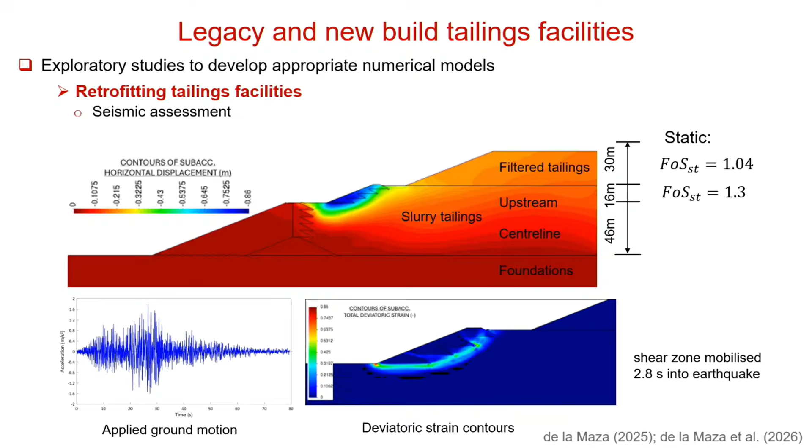So, as I said, this is what we do currently as exploratory studies to understand how to model them. So Nicholas here was also modeling the whole construction sequence over a period of time and everything else. So we are not just taking that as a final geometry and doing something with it. Construction sequence is very important. So that is where our capability and capacity is. So these two are complex geotechnical examples.

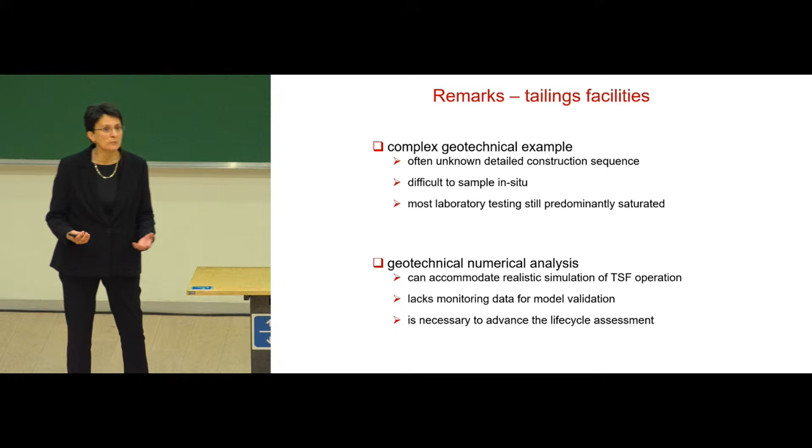What is lacking often is that detailed construction sequence, because some of the structures are obviously quite old. It is difficult to sample in situ, you know that better than us. So understanding the state in situ is not easy. And what we have found is most laboratory testing on these materials is still predominantly saturated. Very little unsaturated testing is done, like places here in Pretoria.

So geotechnical numerical analysis can accommodate these constructions realistically, at least the way we do it. But there is a lack of monitoring data to validate the numerics, especially when we are looking into the long term. For life cycle assessment, having the monitoring data in the long term is really, really important.

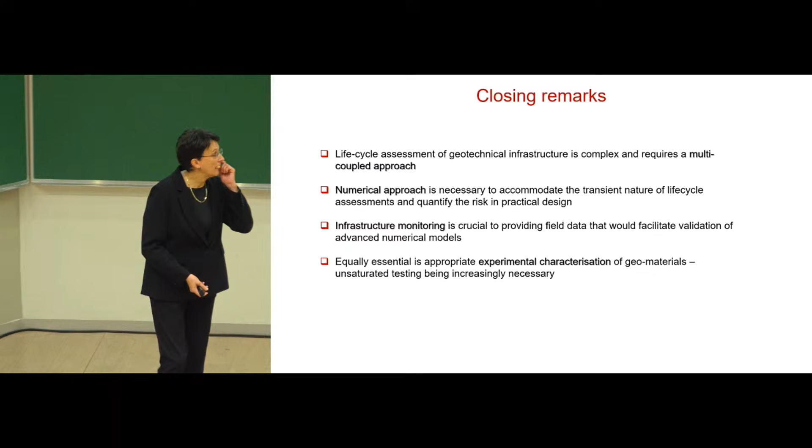And so, just to conclude with a few overall points from this. Life cycle assessment of geotechnical infrastructure is complex because it requires a coupled approach. So it's not drained or undrained, it really is coupled. And soil being a multi-phase material, and structures like this being exposed to the atmosphere, we have to take that into account.

Why numerical? Well, there isn't really much else that we can use to assess the life cycle of any of these structures and to quantify the risk, but to do it numerically. Again, infrastructure monitoring, we keep repeating that time and time again, is really crucial to provide the field data. I mean, rainfall is monitored in many countries, as something that is regular.

The rain gauges in weather stations, but as a profession, it would be really nice if we take the responsibility for long-term monitoring, in particular as much of our industry these days is moving towards machine learning generated approaches that actually do depend on input from field measurements to keep the projections going.

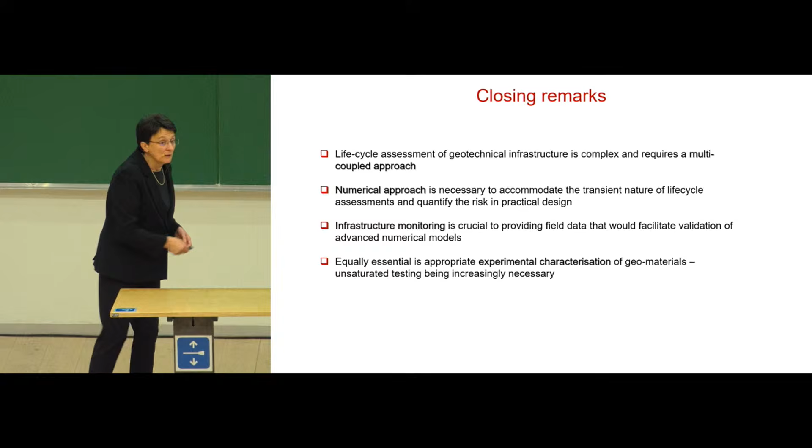Most importantly, apart from field monitoring, the experimental characterization of geomaterials, especially unsaturated, in the laboratory is really a must for this type of infrastructure. And with this, I thank you very much for your attention.